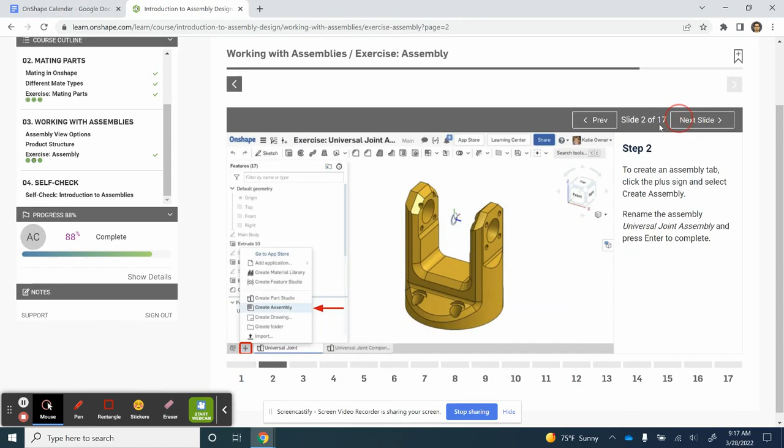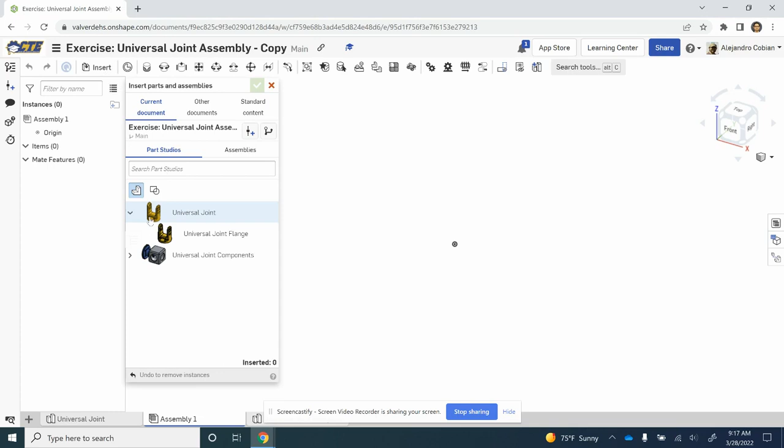So now with step 2, we are going to create an assembly. Put it on here, click the plus sign, create assembly. Now we're just inserting our pieces. So we are going to fix this piece to the origin. So watch closely how we do this. So I go to insert. I open up this drop-down menu. I click on universal joint flange, and then I hit the check mark.

By clicking on this check mark, our object will be fixed at the origin. So notice we just fixed it right at the origin. Well, we placed it on the origin. We haven't fixed it yet. We're actually going to fix it now. So let's go ahead and right-click on our object, click Fix, and we cannot move this object.

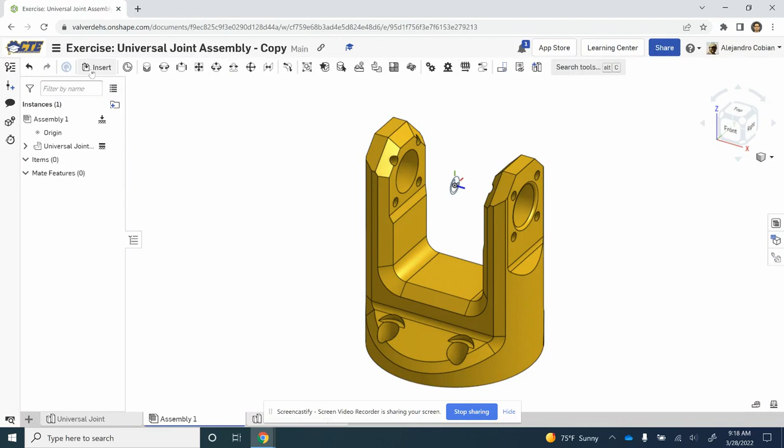So now we're going to add our separate pieces. Notice they're not going to be laid out on the origin. We're just placing them on the side. So let's click Insert, open up this drop-down menu. We click, click, and we place our objects. Well, didn't happen. And here we go. All right.

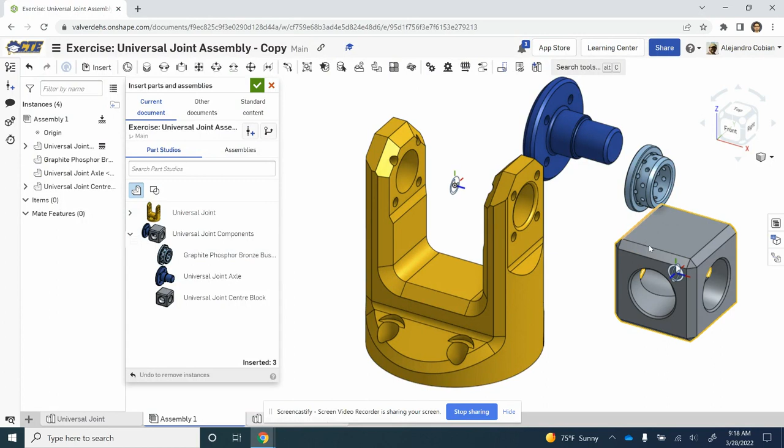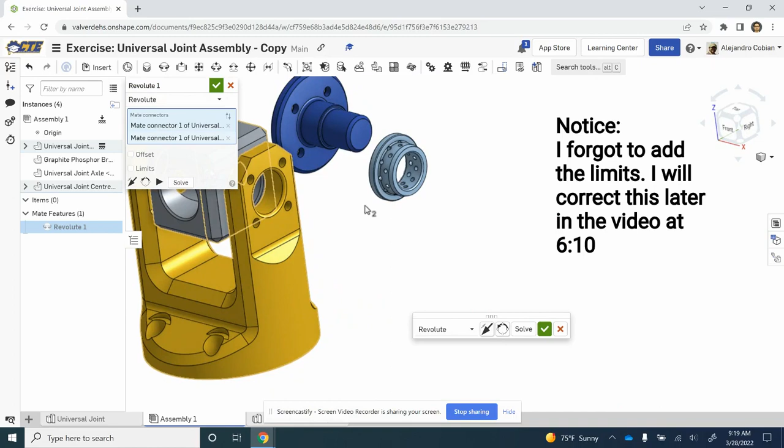Now we're going to be placing our little box right here in between this orange piece here. All right, so that is our universal joint centre block, which will be inside of our joint. So let's go ahead and mate that. We're going to use a Revolute. I click on this piece here, and then I click on one of these icons. I want to get the one that's parallel. So I'm going to go ahead and click on this. All right. So we hit the check mark right here.

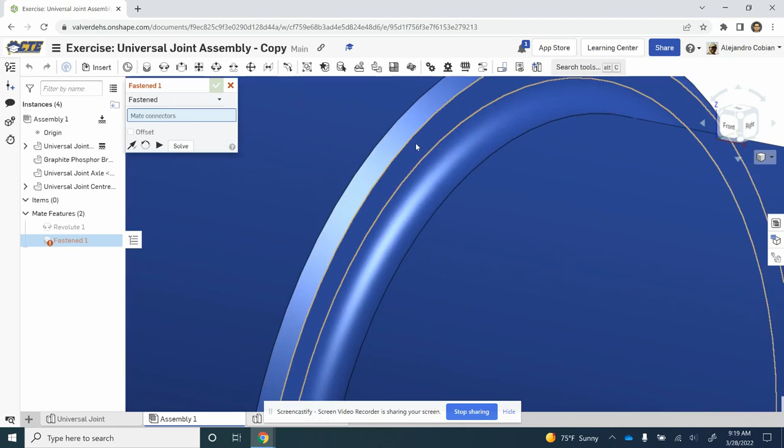And that looks good. Step 7, we are connecting this light blue piece right here to our dark blue item. So notice we do have to click about the center. So let's zoom in. And we want to hover over that area, but we first need to use a fastened mate. Hover a little bit closer. There we go. So now we have it. I'm going to hold Shift. I zoom out. And I click right at the center.

So now I want to get this other piece over here. So notice we're doing it right at the center of this face here. So we hover over here, hold Shift, and go to the center, and we connect that, hit the check mark.

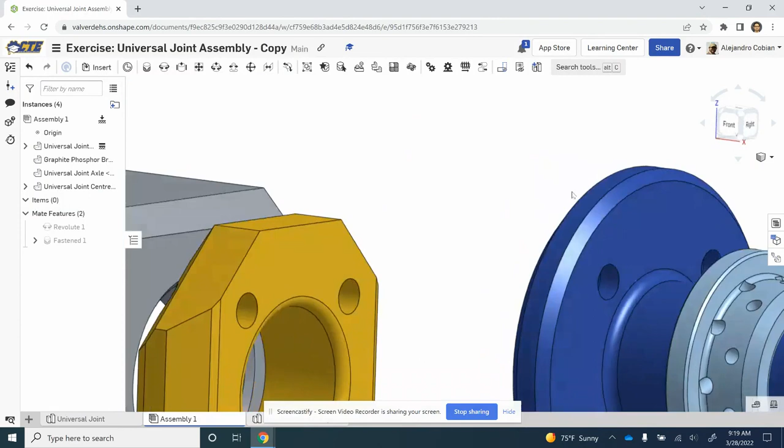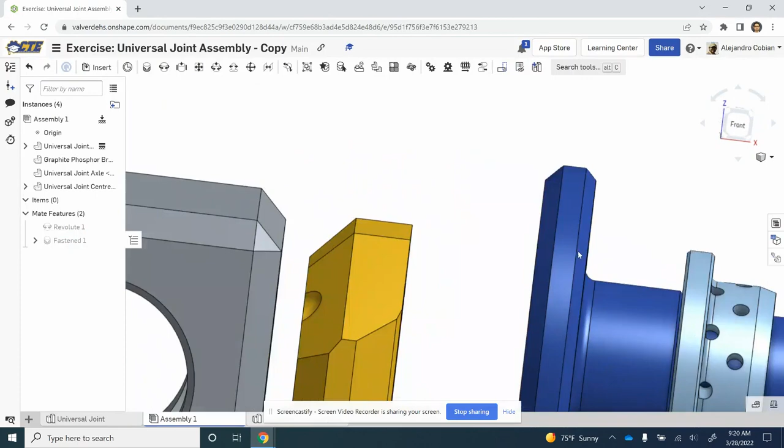For step 8, we are now placing these two connected items in between the joint and the box. So we are going to select this face right here of this light blue item and the center of this face of the box. So let's watch closely. This will be a fastened mate. So I click on fastened mate.

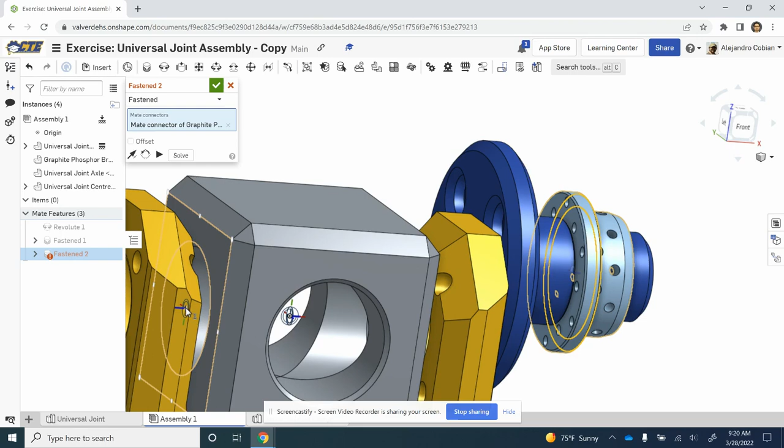I zoom in, and I want to hold Shift on this face right here. All right. I go to the center. I click. I zoom out. I go back to my box, and I want this face right here, the flat face. Hold Shift. Go to the center, and click, and we hit the check mark.

All right, so now for step 9, we are going to move this piece here down to a subassembly. These two items, they're highlighted right now. It's what we just created. So we're going to click on this graphite phosphor bronze bush and click on the joint axle, right click, and move to new subassembly.

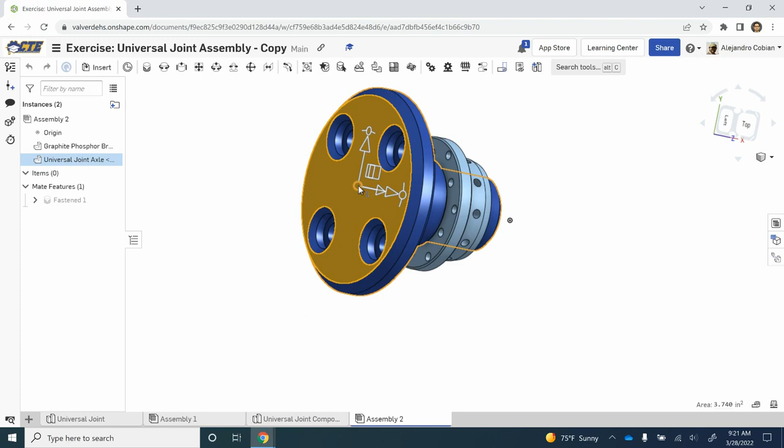All right, so now we're going to be working in this area down here. In this section, we are going to click on this. We're going to left click, right click on the center dot, and we're going to move this to the origin. Now we want to anti-align this. So anti-align with the Z axis.

And now notice this top piece, the flat portion, is facing the top. So let's go ahead and fix this. So I right click and fix this object. So those were steps 10 and 11.

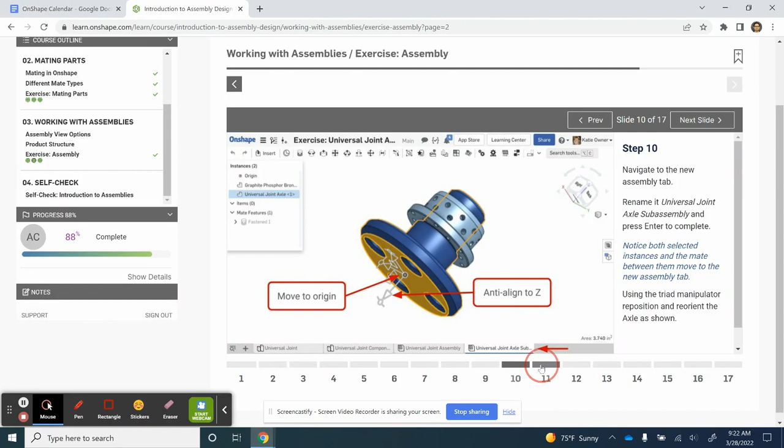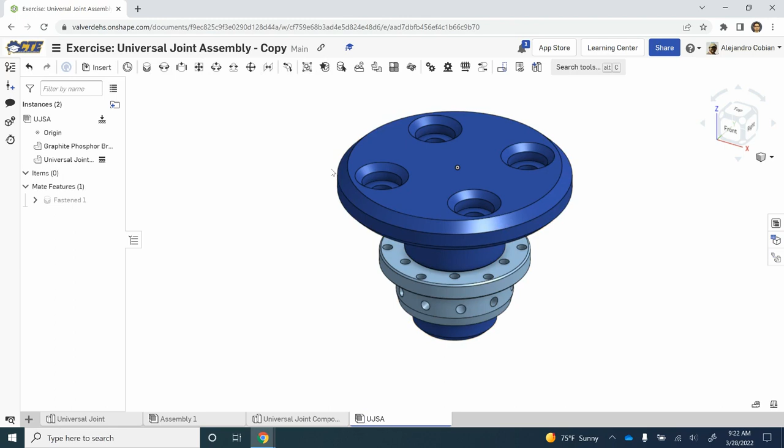For step 12, we're going to use the replicate feature, and we're going to replicate what we've just created, our universal joint subassembly. So I'm going to rename this file, by the way. So rename, and this is now the universal joint subassembly, but I'm not writing that out. So now let's go ahead and replicate. We have to go back to assembly 1,

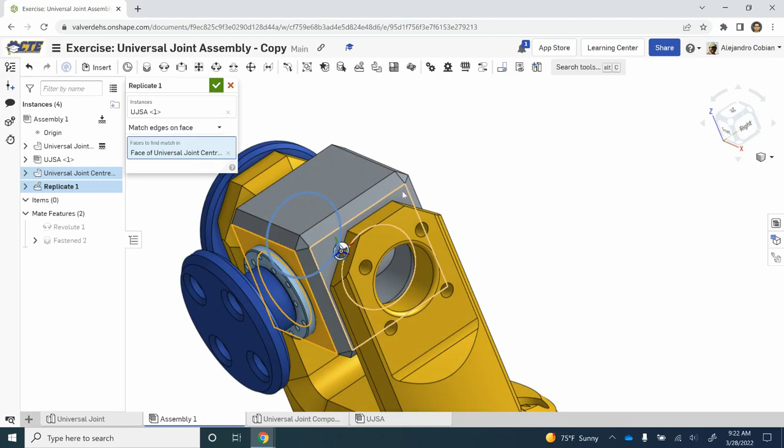click replicate, and notice for instances, we're going to click on our universal joint subassembly. This is what we just created right now, and the match edges on the face, so we're going to manually select these faces. Here's our first face, second face, and our final face. And we just replicated our subassembly. So hit the check mark, and that is completed.

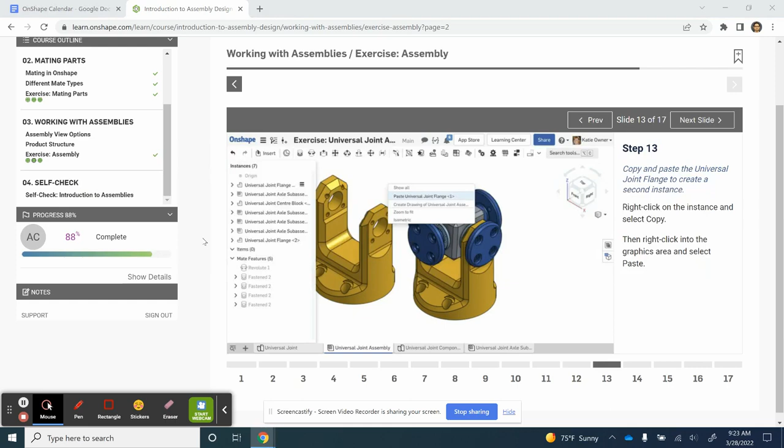Now for step 13, we are going to copy this orange item right here, our joint flange, and we are going to paste it. Let's go to our universal joint, right click, copy, and we just paste it anywhere.

For step 14, we're combining our new joint flange to our box, but this is going to be a little bit tricky. Keep in mind we do need to add some limits. By the way, we forgot some limits in step 6. Let's go ahead and fix that real quick. So we need to fix this Revolute. So we're going to add these limits right here.

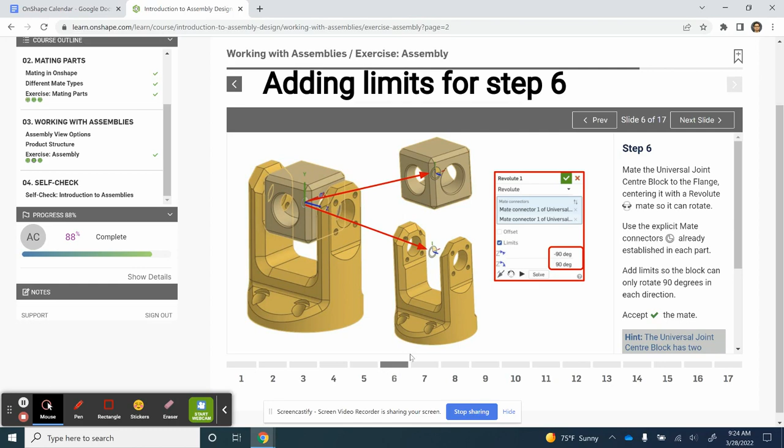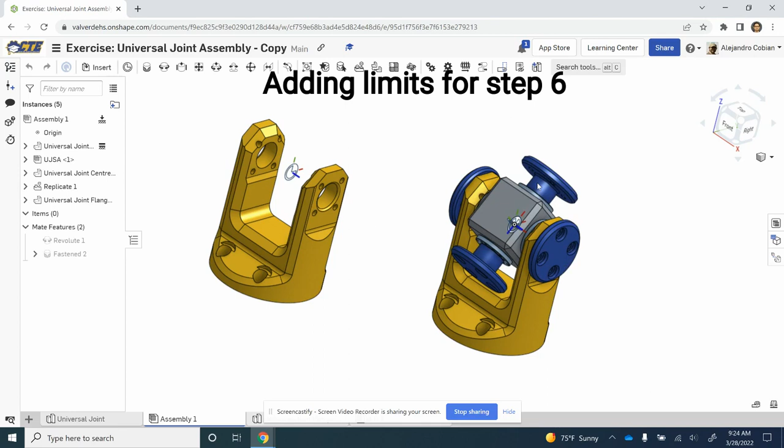So we go back to our Revolute, we can click edit, limits, we add a -90 rotation and then a +90 rotation. So this allows us to spin our object 180 degrees. So notice it is able to spin 180. And I'm going to just reset that.

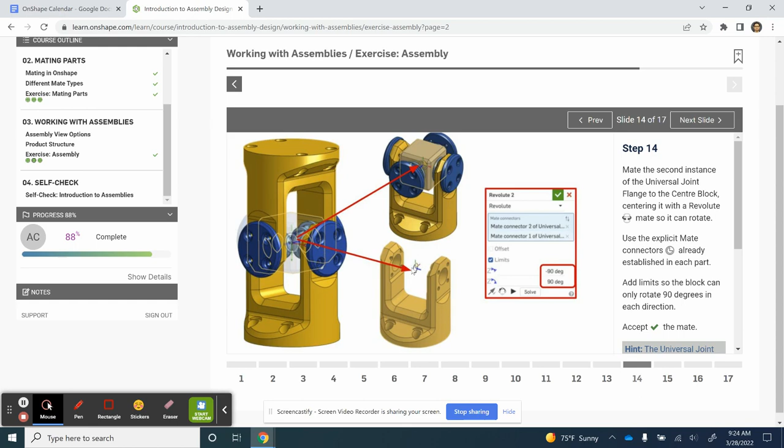All right. So now for our last piece, we're going back to our step 13. We already copied our item. There it is. We're back on step 14. And in this situation, we are going to use a Revolute mate to connect the box to this new flange. So here's a Revolute mate. I click on this item. I notice this mate connector here.

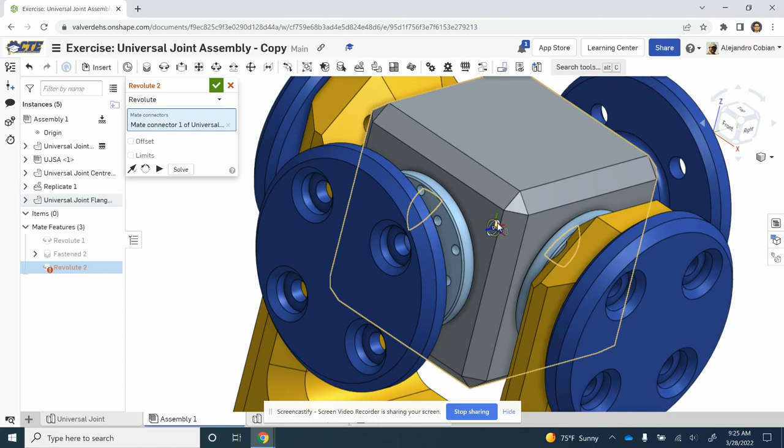We already connected our first flange to one of these planes. So now we're going to connect it to the other one. Let's see if we get the right one. So I'm going to click on this one here. And let's add some limits to get some rotations, -90, 90 to play. So we got it on the right section. So it's spinning well.

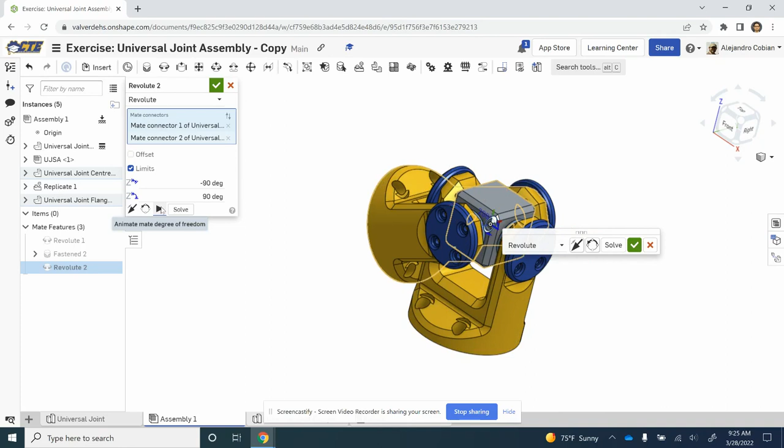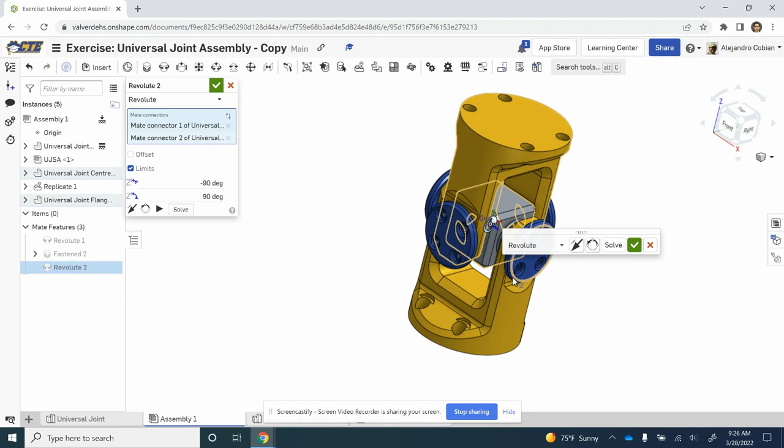All right, but I'm not enjoying how it's spinning, so I'm going to flip it. And that's how we want it spinning. We want it spinning -90 to this direction over here, and then +90 in the other direction. But it should not overlap with the bottom section. All right, so hit the check mark. And notice I drag it over, and it is able to move.

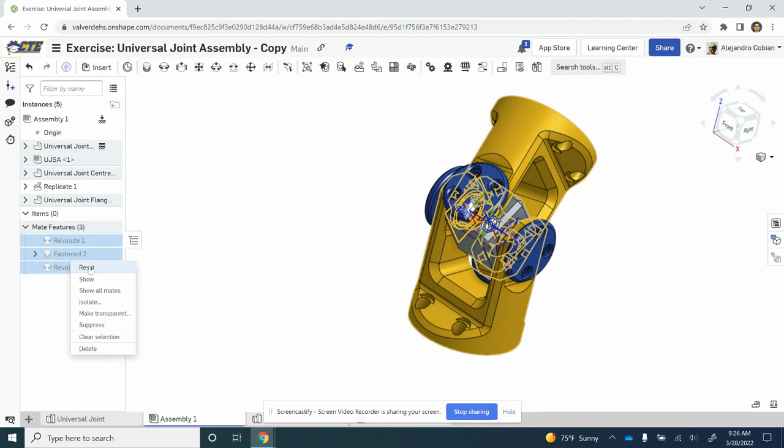And for step 15, we're just playing with this item. We already did, and it works, so we're good to go. Now for step 16, we are resetting all of these features here. All right. And for our final step, we are checking our mass properties to check the location of our new joint flange, which is this item here. So go ahead and click on this mass properties feature and use that to check for understanding in the following section. Thank you for watching.